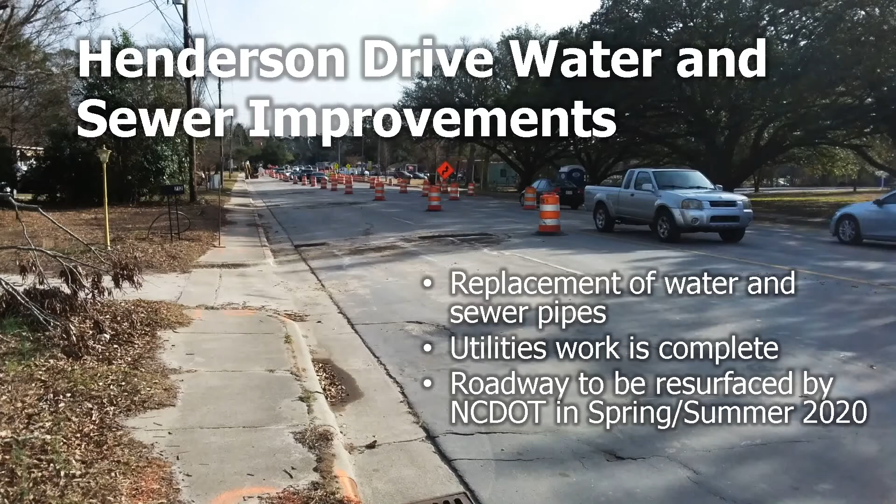The Henderson Drive water and sewer improvements are complete. This was the replacement of water and sewer pipes. We recently finished the work, and we are looking forward to NCDOT repaving Henderson Drive in spring, summer of this year. Everybody's looking for it. Yeah, absolutely.

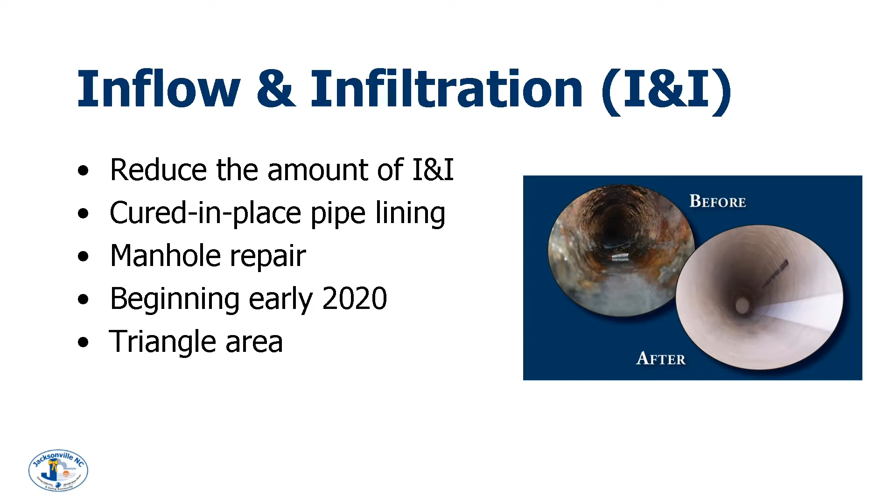On inflow and infiltration, the purpose of this project is to reduce the amount of I&I by looking at sewer lining options, to keep inflow from coming into the pipes and inundating our system, taxing it and creating problems down the road for our LTS land treatment site as well. This also includes manhole repairs. The work will begin early 2020 with the triangle area.

As we've talked before about Holiday City, mobile homes generate unique chances for water to get into our system because over years, a home may be pulled out and another one pulled in, and they may use the same sewer service, or they may just put a new one in. You never know. So we find services that have just been abandoned or stubbed up under a mobile home that hadn't been closed off. This is one of the areas we see a lot of I&I.

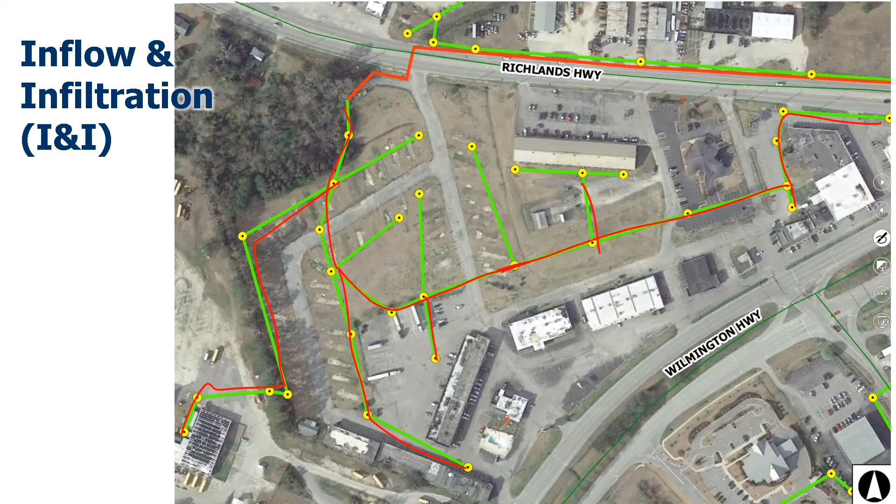And then what we're discussing is possibly, when we line it, not reinstating this. So the line stays there, but we don't actually spend the money lining each individual one. So it'd be closed off? It'd be capped, closed off. So if you ever had to reinstate it, you could go in from inside the pipe and just reinstate that. Gotcha, okay.

Is that line owned by the city, or is it owned by the mobile home park? I think all of those are probably maintained by the city.

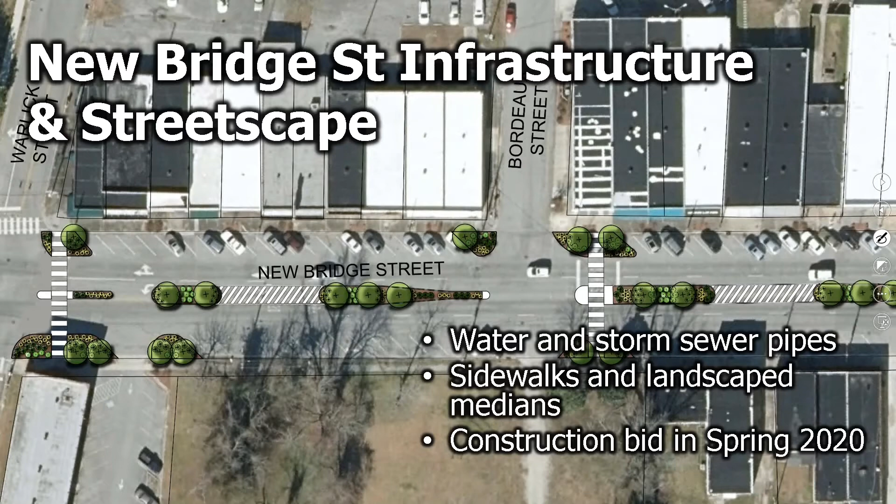This is a major project that will be starting this spring. The plans for phase 1 are complete. Phase 2 plans will be complete by end of this month, and the third phase is the outfall portion, the design of which is underway. We're at about 35% design on that now. So we'll be able to start construction this spring.

This project includes underground utility work, including water and storm sewer, as well as sidewalks and landscape medians. And then repaving of New Bridge Street. We anticipate this project to take, looking at some bidding options here, but we anticipate this project to take at least a year, possibly longer.

It kind of depends on how we set up the bid. But we're going to do that to the city's best advantage and to lessen the impacts on our downtown business owners.

Did the discrepancy of asphalt thicknesses all get cleared up? Yes, you kind of have to work with what you have there in terms of elevations. That influenced some of the bid prices because it was a lot thicker in some locations. Or am I thinking the wrong site? I think you're thinking of Henderson Drive, where we ran into asphalt sections that were 12 inches thick. Right, and then we had to repave. We had to match existing.

That divider thing is going to make it one lane on each side, is that correct? Correct, that's the plan.

Will you have to wait on DOT to repave it, like you did Henderson, or? No, this is a city street. That's a city street, right? Yes, city will take care of it.

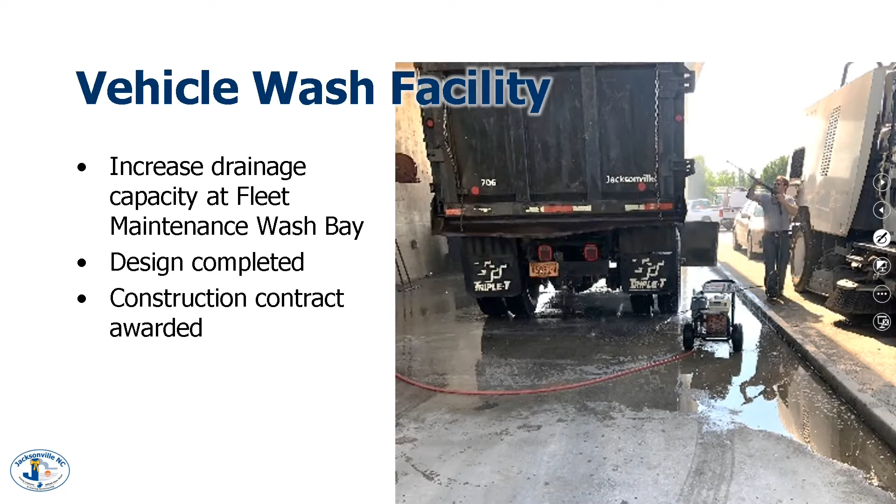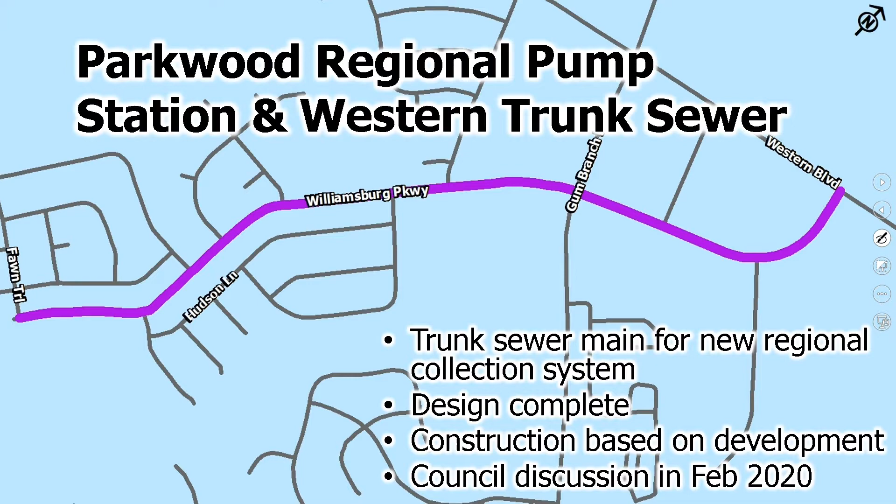This is the big one, the Parkwood Regional Pump Station and Western Trunk Sewer. The design is complete. This again is the sewer main for the new regional collection system on the north side of Jacksonville. The construction timeline, or when we plan to start, will be based on projected development. We're going to have a council discussion about this next month.

So by design complete, you mean all the way across the river? Yes. And easements are obtained and permits? Really, they've all been obtained? Literally, we could bid it tomorrow, but it's such a large, expensive project, we don't want to do it any sooner than we have to. But the corridor has been reserved and safe. Correct.

The Decatur lift station elimination. This project entails replacing the Decatur lift station with a new gravity trunk sewer. We've been monitoring the flow at this station to make sure we're understanding the entire problem there, especially with potential I&I. We just completed the flow monitoring and now we're evaluating the data we have in hand. We'll complete the design this year.

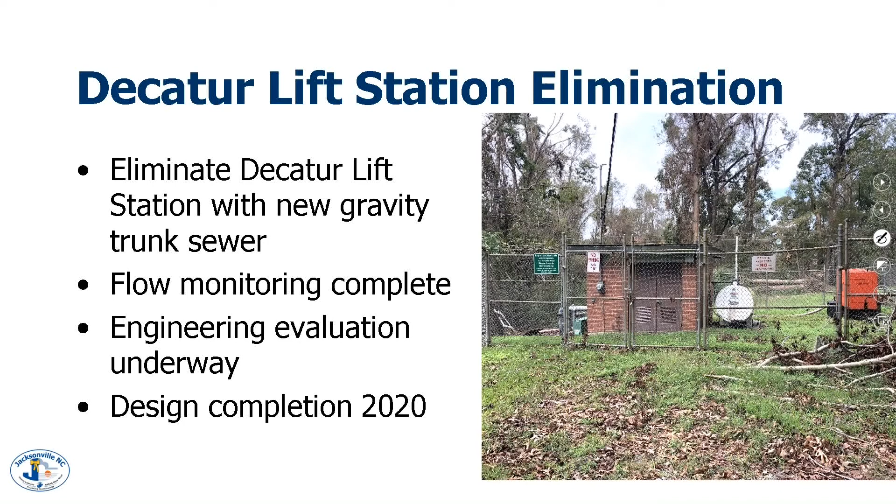Correct me if I'm wrong, but initially what we found in our flow monitoring is there's a lot of flow there above what we would normally expect for a basin of this size. Correct, which is an indicator that we have inflow and infiltration into this area. Have you smoke tested that area already? We have previously, but we probably need to do that again. We've smoke tested a lot of Northwoods over the years, not all at once, but that may be something we have to come back and look at again.

Next project is the Ellis Lift Station upgrades. This one had significant flood damage. We're looking at some long-term solutions that will set the station up to be perhaps relocated in the same area but uphill, to get it out of the floodway there. We're looking at some grant funding that is tied to better resiliency, meaning the businesses and residential areas that are all draining to this area will keep functioning in case we ever have another Florence-type event.

Is the funding with grants available for both repair and replace, or just one? The repair will be done with FEMA funds.

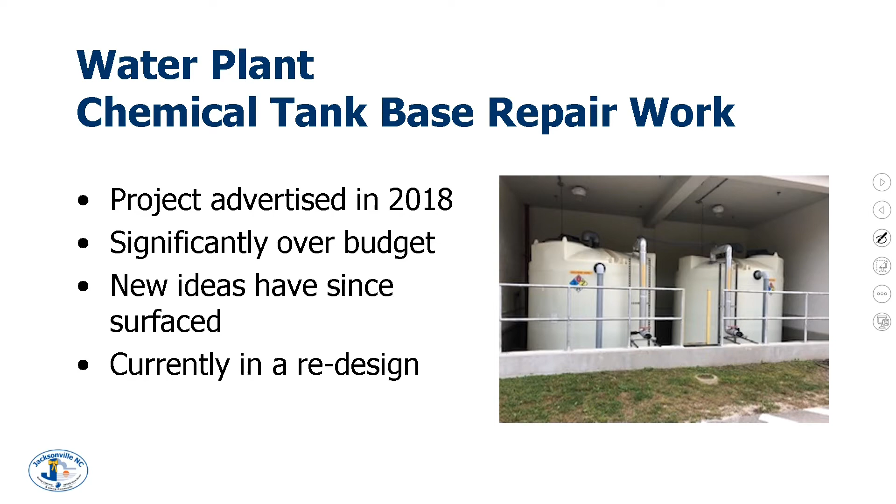The water plant chemical tank base repair work - this design has sort of evolved a bit. We've got some new ideas to incorporate into this. The consulting engineer is still working on the design at this time. You may recall this project was bid back in 2018 and was significantly over budget, like 3 times. So we're taking a different look at this and working on that design at this time.

Water plant maintenance bridge. This project stems from the need to get out over the trains and do some maintenance work over them. We've been evaluating equipment versus structures, that sort of thing, to give us access to those areas.

We've arrived at a decision to try some scaffolding. We think that's a pretty simple solution, doesn't require much maintenance for scaffolding, that kind of thing. So we're going to try that out, see how that works, and hopefully that solves all of our problems. It also will allow us to get up to the big fans in the roof to repair those and get all of our ventilation equipment operating again.

There was a problem with putting big equipment in there, wasn't there, because of the weight on the floor? That's correct. The grates in the front that you can see here are rated for equipment. The grates that run all the way down, mirroring this in the back, are not rated - they're personnel rated, but not equipment rated. So that's what's somewhat forcing us to look at other options.

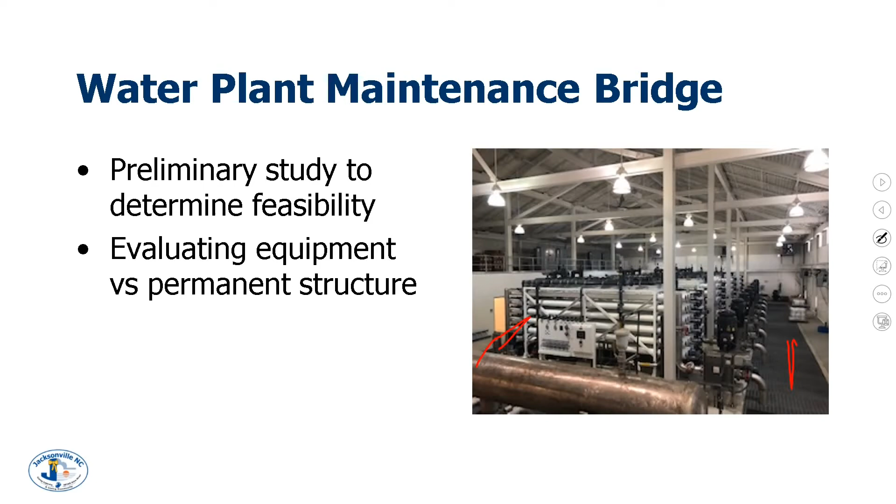If one of you guys fell, that's part of it. I know a person that fell. Yeah, there's damage to equipment and everything else. So what are you talking about?

Putting scaffolding in, doing whatever you need to do in one area, then moving it and doing maintenance. Some of the scaffolding we're looking at is what they use to side houses with. It's a column that goes up here and a column that goes up here, with a plank between them, and you can raise them. They're pretty quick to set up and take down, they don't have a huge footprint, and they can hold about 1,000 pounds.

They're not that heavy, and we found some that actually go up 50 feet, 48 feet I think. So we're pretty close.

You're gonna have a couple people standing below with attachment, right? We have standing tie-back. So are you talking about buying them, not renting? Yes, because a lot of people rent them, but Joe actually went to United Rentals to see if we could rent some, and they don't have any we can find anywhere.

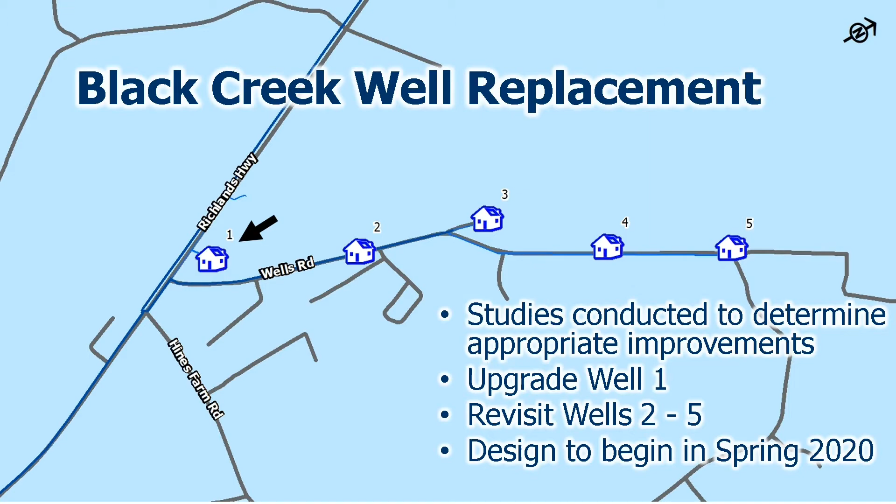We think that was due to head pressure on the line. Well 1 was there first, so originally it just pumped all the way into the city. But as we added wells to that line it was pumping into, we drove the pressure up on that line. So we think what would happen is we would put more pressure on the line than that pump could handle and send water into the city. So we would end up just shutting the pump down. It had a protective switch in it and would just shut off. So that's a great candidate.

And then, as you'll recall, we'll come back and reevaluate wells 2 through 5 and look at possibly abandoning or converting some of those wells to monitoring wells, and maybe drill one or two in replacement. We've generally talked with the state about that, and they are in support.

How close is that well to the road? To the road, it sits a couple hundred feet off. It's not likely to be hit. You said that about other things the city owned too, didn't you? It's about 100 yards back. Okay, and it's hidden behind trees. I was just wondering, it looked like it was close on the map, that's why I'm wondering. It's just not as close as it looks on the map.

I think that's happened before. And we expect, on that highway... what was it, the chlorine station got hit? Vehicle got run off the road and ran right into it, ruined it.

Took it out. So all of the testing that we've needed to do and all the camera work has been done. So now we're ready to move to design, now that we have what our actual scope should be.

When you do the additional wells, will they be done in such a way that you won't end up with that overpressure and you won't have a pump problem? Yes, absolutely. That'll all be taken into consideration.

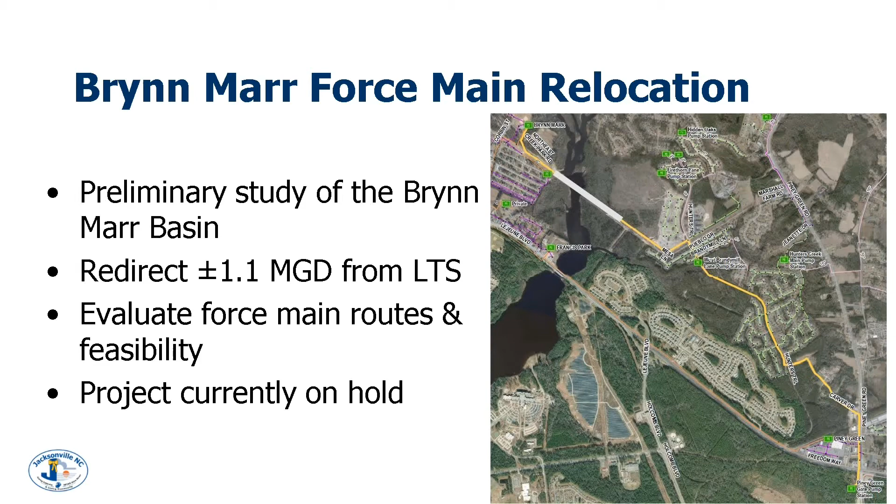That's the reason we showed it, where it just comes out the back of the station, goes across the creek, meanders through what is Hunter's Creek, and then ties directly into the base with a force main. And we also looked at coming out to 24 and all the way down 24.

This one was not the highest in construction cost, but at the top end of the range. Going over to Piney Green Road was much cheaper in construction cost, I think it was in the $7 million range. And the problem was we had to upgrade our station, and we had to upgrade ONWASA's station and some of their system, and then you had to continue to maintain those stations.

They also analyzed the O&M cost over a 20-year period, and if you looked at the construction cost and the O&M over that 20-year period, while that option was cheaper up front, it was much more expensive in the long run. Because here you're maintaining the station you already have, and I think they said you could do it with the pumps we currently have. So then you're just maintaining a force main because you're already maintaining the other stuff anyway.

But the pipes on the other side through Hunter's Creek, are those already existing? No, that would be all new. The yellow line would be all new. Okay, so when you're talking that type of cost, it really, at this point, outweighs the benefits that you would get.

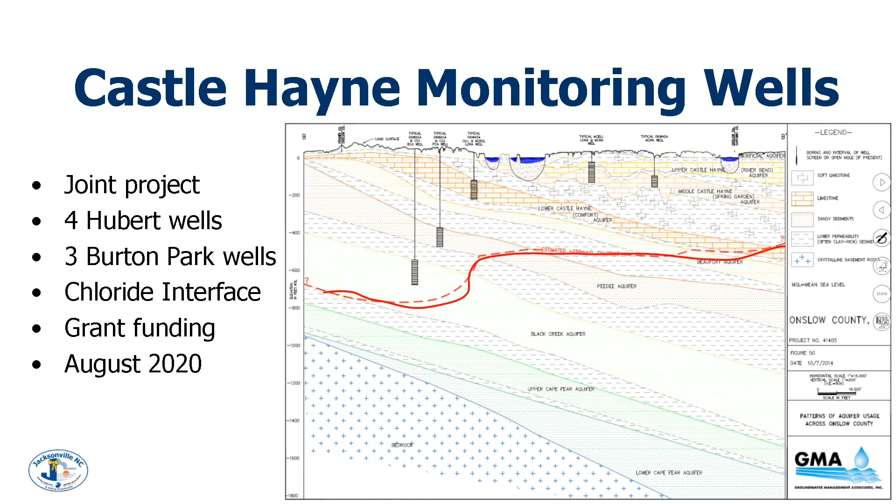And then the fourth well would be surficial, so 40 feet down or so. When we talk about a monitoring well, it doesn't have a big well house or pumps associated with it. It's literally 6-inch pipes that come up out of the ground about chest high, and they have locks on them. But it allows us to grab samples from the water that aquifer the well taps and do analysis on the water quality along with the chlorides, and use that information to gather data.

And while we're working together to construct these wells, the state has agreed to take over maintenance and monitoring of the wells, so the information will be available to everyone.

So will they be putting in continuous monitoring devices? We have talked about continuous monitoring devices, but if they do that, the state would do that, and they would maintain them. They use something called a HOBO unit. You may be familiar with that. Yeah, we've got some up in the northeastern counties right now. Yes, so they have talked about doing that.

And then the other location, if you remember, we put 3 wells in at Burton Park, doing the same thing for the Black Creek Aquifer. And this would locate 3 Castle Hayne wells in that location. The primary reason for that is when we were drilling the Burton Park wells, Dr. Spruill noted that on the geophysical logs, the Castle Hayne aquifer at that location was over 200 feet thick. So his comment is, we may need to be looking there for source water. That's the purpose of those wells, to look primarily at quality, and then whether or not that is a good place to locate wells in the future, whether that be for us or ONWASA or some sort of joint venture. But if you'll recall, our best well is the Deerfield well.

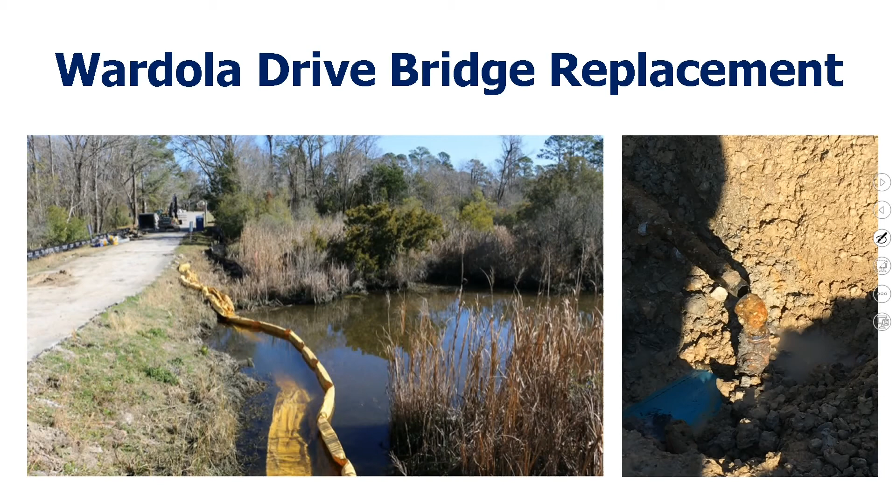Staff responded very quickly, both Anthony's crews in utilities maintenance and Pat Donovan's stormwater crew responded. You can see there, we pulled out a boom. While that won't necessarily contain the spill, it slows it down. We used our vac truck to vacuum up. They did dig a little containment pit, so that caught a lot of it. We used our vacuum truck to suck that up, as well as a portion of the creek that was most concentrated. So we did what we could to help remediate the situation, but the contractor was actually digging, looking, trying to spot the force main, and came across an undocumented line.

Is this something that was there probably with the Wilson Bay plant, or is that something that was put in since then? So the main force main actually comes from when Wilson Bay was abandoned. It's actually the force main from that pump station that pumps over to, I think it goes all the way over to Canterbury Street, and comes in that way, back through to the main pump station.

Less than 20 years old. So it's not one of those ancient undocumented ones? No, it's not, but it's not shown. We had the plans, and it's not shown on the plans. I don't know if, it could be one of those things that when air gets trapped in a line, it causes problems with your station. It just has trouble pumping against that pressure of the air in the line, and the pumps will actually sit there and spin and not move any wastewater.

So it's pure speculation, because we actually have it going on in another part of town - there could have been air problems that our utility maintenance folks at some point came in and said, well, if we can relieve the air here, maybe that'll solve our problems. Again, pure speculation, but as you can see, they didn't actually hit the main. Yeah, it was a little line tied off the main that we didn't know existed.